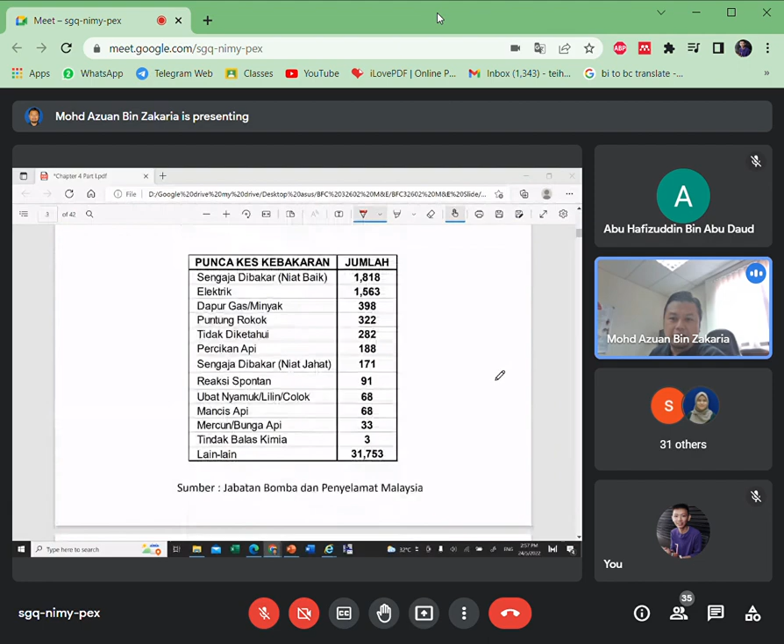Fire safety system is also very important in building, as I will explain later. It is one of the requirements before a building can get permission to live in, right? Hopefully you already read it, so we can discuss and communicate in two ways about the content. Okay, let's look into some statistics.

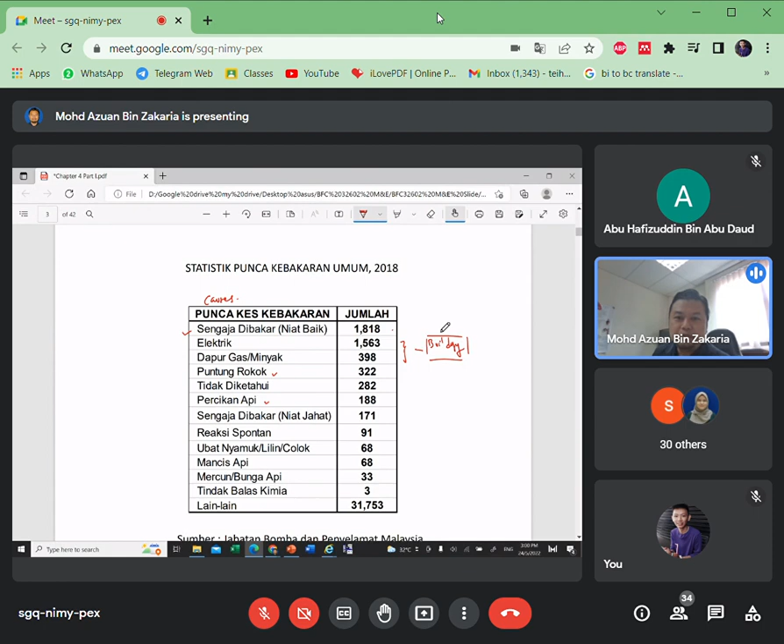This is a quite serious problem, because building is where we live, as a residential place or a place to work, but it is prone to fire. That's why fire safety is very important.

As I mentioned before, fire safety is one of the requirements to get certificate of completion and compliance, to make sure the building—if it's a newly constructed building—needs permission to be able to live in, and one of those permissions comes from the fire department. There are many requirements for a new building, but fire safety is also one of the important requirements.

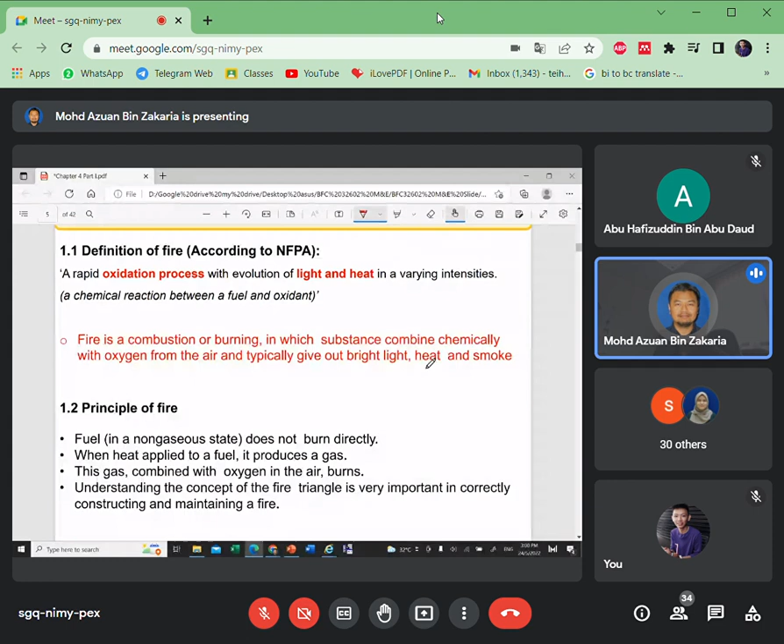All right, let's move into what is fire. How can fire happen? Hopefully you already learned this. As you can see in these slides, how fire is created is important to understand, because when you understand this, then you know how to deal with fire.

Basically, fire happens when 3 components combine together: fuel, oxygen, and heat. What is fuel? Fuel is actually a combustible material or substance—not only petrol, not only gas, but any combustible material or substance can be categorized as fuel.

And then we have oxygen, which is in the air, and heat, which can be a spark. So a spark of fire combined with air and combustible material—when these exist together, it can cause fire.

When you understand this, you know that if we want to remove the fire, if any of these components are removed, the fire will go out. So to remove fire, we have to remove one of the components—if there is no oxygen, the fire will stop. If we can separate the fuel, we can remove the fire, or if we can remove the continuous heat, we can remove the fire. So fire needs all of these.

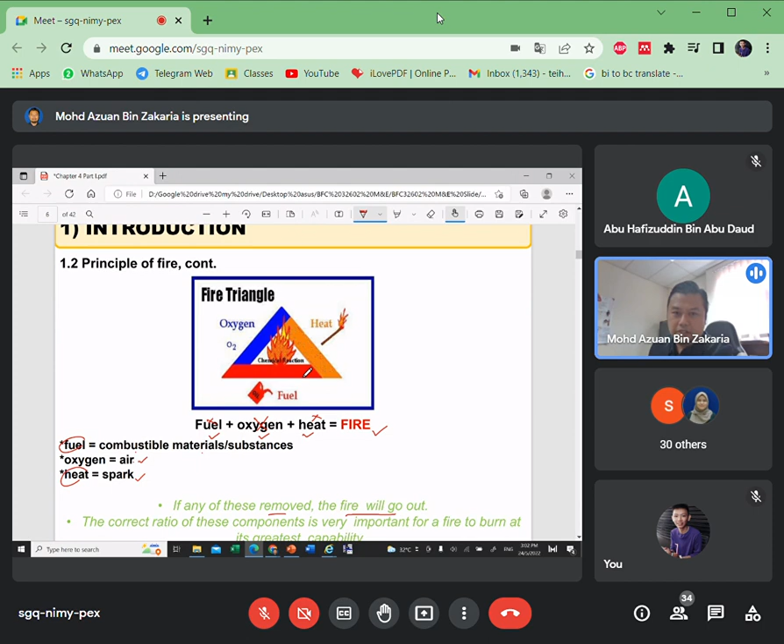To remove fire, there are firefighting agents—five categories based on NFPA, the National Fire Protection Association. This is global, there are five categories: Class A, Class B, Class C, Class D, and Class K. What you have to know is different classes of firefighting agents use different materials, or are suitable for different materials.

For example, Class A involves flammable solids. What type of solids? For example, woods, cloth, rubber, paper, and some types of plastics. So basically, it is for solid materials.

So how do we extinguish the fire for Class A? We can use water, dry chemical powder, and foam. What is dry chemical powder?

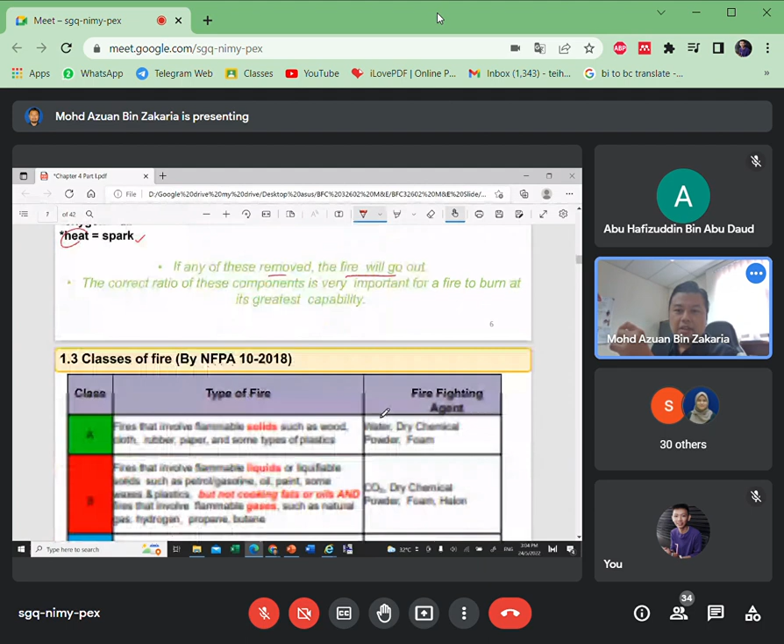The chemical powder is, for example, as you see in the fire extinguisher in the red tube, labeled normally ABC. It will pump the powder to extinguish the fire. Basically, chemical and foam want to provide a layer that can separate the fuel from the air. Water is to remove the heat, dry chemical powder also removes the heat and can separate the combustible materials. The foam creates a layer to divide the fire and the oxygen.

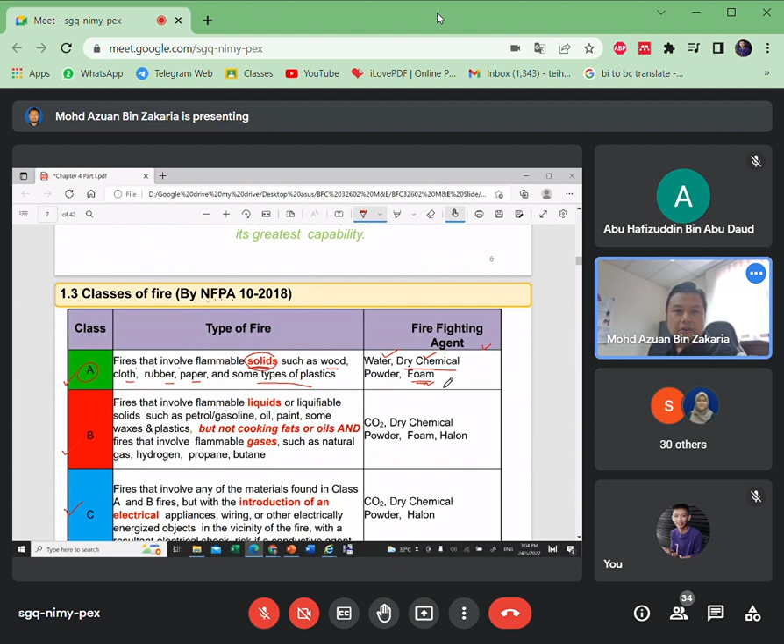All right, that is for Class A. What about Class B? Class B is fire related to liquids or flammable liquids, except liquid related to cooking. Class B is fire that involves flammable liquids such as petrol, gasoline, oil, paint, and some wax and plastics, but not cooking fats or oils, and fire that involves flammable gases. So not related to cooking is B.

So in this case, we can use carbon dioxide, dry chemical powder, foam, and halon. Halon and CO2 are actually gases. So you can see that we cannot use water. Class B, if there is a flammable liquid, we cannot use water. You need to be able to distinguish about it.

Class C is fire that involves any material involved in Class A and Class B, but with the introduction of electrical appliances. So basically, C is related to electricity, fire that involves electrical appliances. In this case, we can only use carbon dioxide gas, halon gas, and dry chemical powder. We cannot use water. We also cannot use foam, because foam also contains some mixing of water, and it can be a thermal electric conductor.

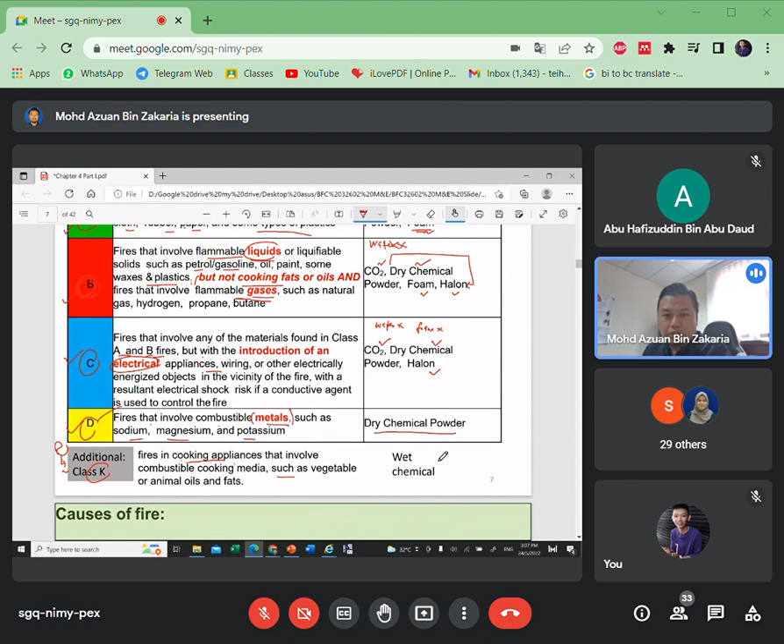Lastly is the additional class, Class K, number 5. Class K is for fires in cooking appliances. So any liquid from B, except for cooking fats, oil, and flammable gases, is moved to Class K. For Class K, the suitable material is wet chemical.

So by understanding this, if there is a given case study, you know what is the suitable firefighting agent to be used for a certain case. You need to understand first what type of material is involved, or what type of material or equipment is mostly in the room, and then we can provide the suitable firefighting agent.

Next, the important thing is for buildings, normally there are two types of fire protection system: one is passive, another one is active. So is it okay if I ask you, what do you understand about passive system?

Anybody? You can also write in the text box. Okay, based on your reading, what do you understand about passive system and active? Any answer? Tak ada. Okay.

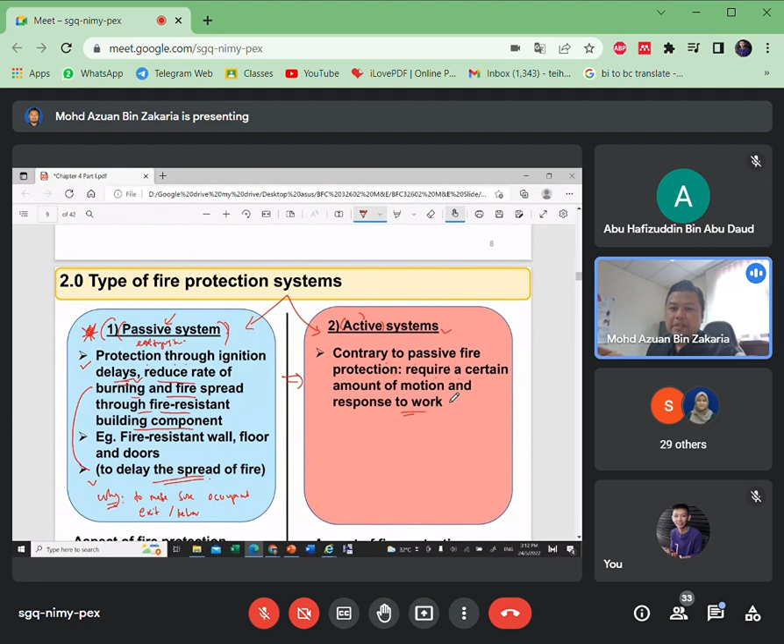Next, we look into the active system. Now, active is opposed to passive. So in active system, contrary to passive fire protection, it requires a certain amount of motion and response to work. Basically, active system is where a trained person or the system itself needs to extinguish the fire.

So hopefully you can understand the basic fundamentals. Thank you for your answers, both of you, all of you. Your answers are basically correct, but let me explain further.

Okay, there are many examples or aspects of fire protection in passive system, but here I bring up several, which are building utilization, compartmentation, and means of escape.

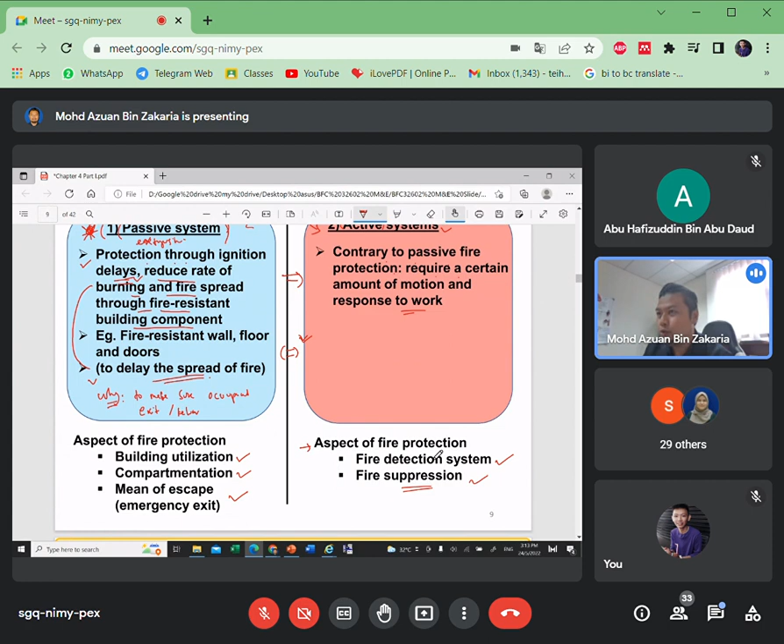For active fire protection system, we have detection system and suppression. Suppression means to extinguish the fire. So basically in a building we need both systems to act together.

All right, let's go into passive system number one, building utilization. If we look into the definition, it means limiting the number of persons using an undivided space, such as meeting room, classroom, auditorium, hotel room, or stadium. Building utilization normally exists to limit the number of people.

Why do we want to limit the number of people? For example, if in a building - this is the plan of a building - we have an office, a meeting room, and an open space working area. It has an area, in meters squared. So based on each area and number of doors, it should be designed to be suitable for the number of occupants.

We need to limit the number of occupants working in a space. The reason, as you can read here, is to ensure occupants are able to leave the building through the available number of exits in a reasonable amount of time, without trampling each other in a panic situation.

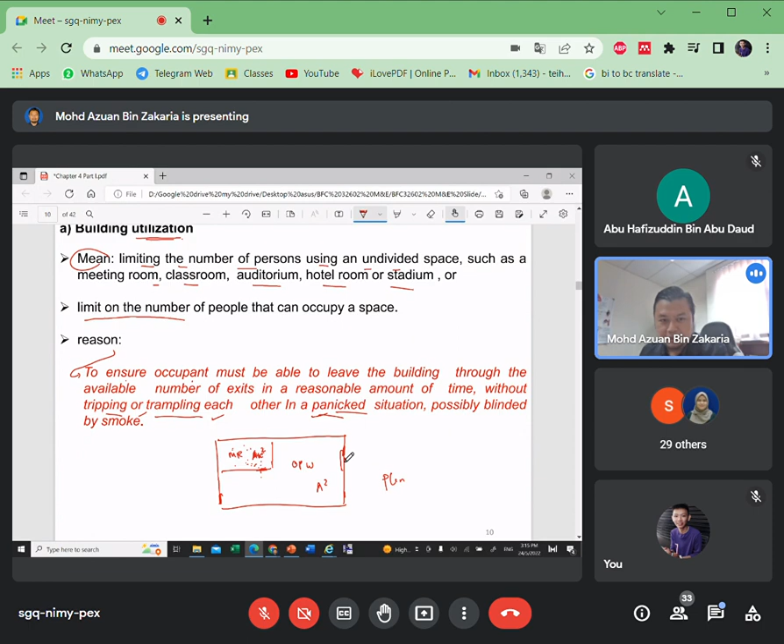Without trampling each other in a panic situation, because everyone panics, right? So if there are too many people, they tend to panic and push each other, trampling or tripping each other while trying to leave the building. But you can understand the name utilization - building usage, space usage. That is number one, building utilization.

But in detail, there are many requirements or regulations regarding utilization specifications you need to refer to. In Malaysia, we have the Uniform Building By-Law document, or the Fire Safety Standards of Malaysia.

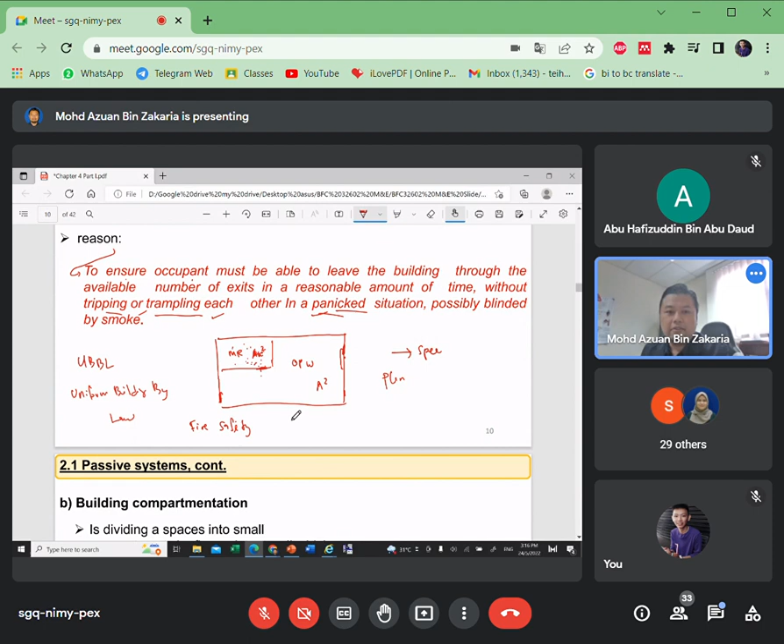So in this course, we introduce you to the types of systems, but if you want to learn more in detail, you need to refer to all of this, because it is very detailed - based on the area, based on the type of building, what is the required, available, allowable number of people that should be working in that confined area. All right, number two is building compartmentation.

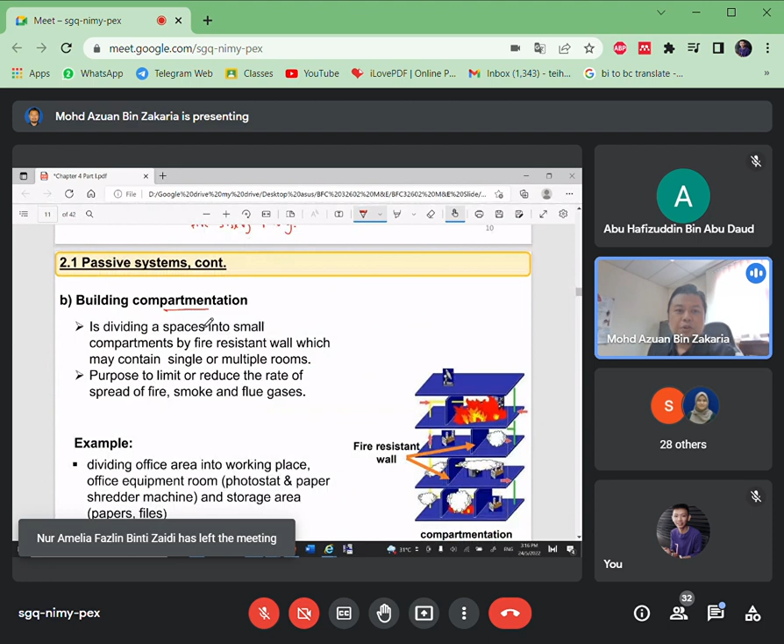As you can see here, the definition is to divide a space into small compartments by fire resistant walls, which may contain single or multiple rooms.

Let's see in this figure. So if we have several stories, to make sure the fire doesn't easily spread, it is suggested to make a compartmentation. Compartmentation is to make the area smaller by a partition made of fire resistant wall. For example, if fire happens, it can still spread, but it will delay.

Because the wall, normally a fire resistant wall, has many specifications. There is 1 hour retention, 2 hour retention, 3 hour retention, depending on the thickness and the material.

And sometimes if you already learned building design or concrete design, you have a beam, for example, and also concrete cover. The thickness of the concrete cover also plays a role and gives an impact on how many hours the structure can retain or delay the fire.

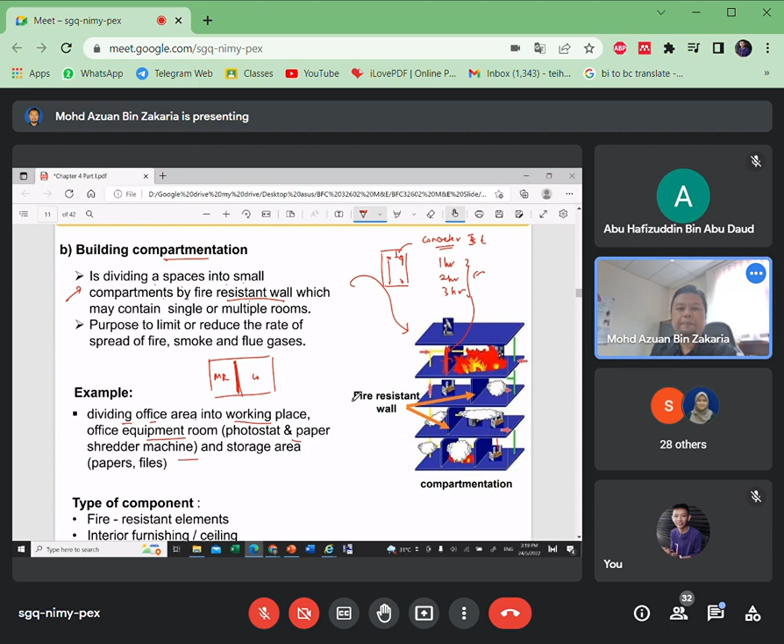So for example, they suggest that the area with many combustible materials such as paper needs to be divided like this. This is the working area, this is the machine room, divided by a compartmentation wall. The important criteria is that the compartmentation wall should be made from fire resistant element.

So this is some figure. Fire resisting element can be fireproofing material, fireproof spray material, or the building material itself, for example, fire resistant door or partition wall.

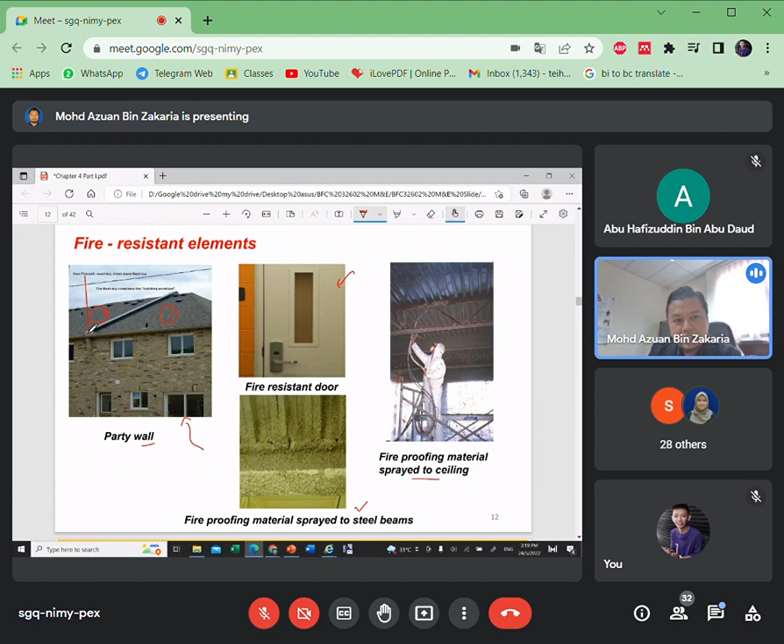So in this figure, normally in Malaysia also we can see if you live in a terrace house - this is house number 1, this is house number 2. Basically, you can see a slight increase in the roof. This is what we call a party compartmentation, or party wall.

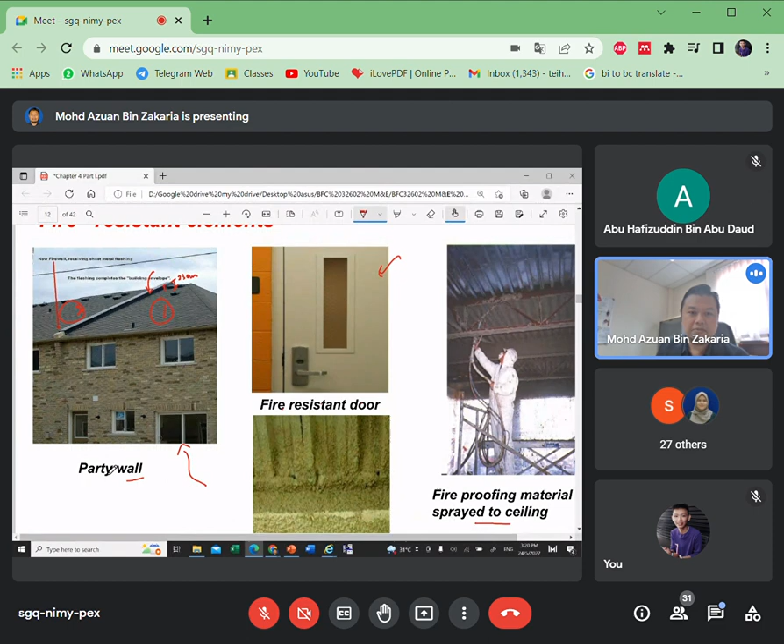In some specifications there is a required number. For example, 230 millimeters should extend from the roof to show that this is a party wall. This is for fire regulation. It's not just designed to extend a little bit - it's a requirement that a party wall should extend several millimeters.

Okay, last but not least, for passive protection - the purpose is to make sure people can evacuate properly. So it is a means of escape.

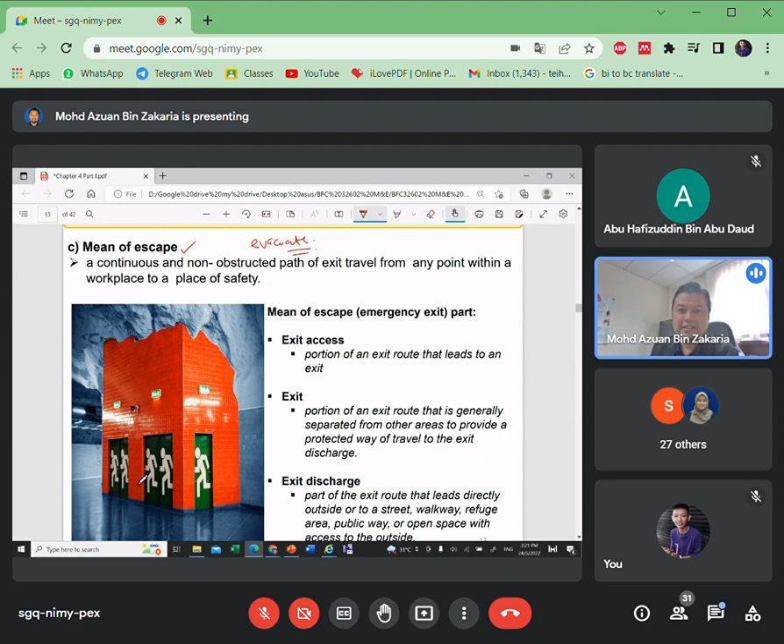So you can see means of escape, or safety stairs, somewhere. Maybe before this you didn't really think about the importance of means of escape. And normally the door of means of escape is not always closed - sometimes people prop it open for a long time. But actually means of escape is one very important thing that needs to be applied in a building.

So basically it has 3 portions: exit access, exit, and exit discharge. Exit access is a portion of the exit route that leads to the exit.

Let's draw maybe here. Okay, let's use this example. So we have 3 parts: exit access, number 2 is exit or exit route, and number three is exit discharge.

So basically in a building, it's already properly planned. For example, here, if you're working in some of this area, this example is the exit route, and before this is a fire safety door. Exit access is the area where the path should not be obstructed and should clearly lead to the exit door.

So the exit access requirement is that the exit door and exit access should be clearly notified, and the path should not be obstructed. This is exit access, the way the path leads to the exit route.

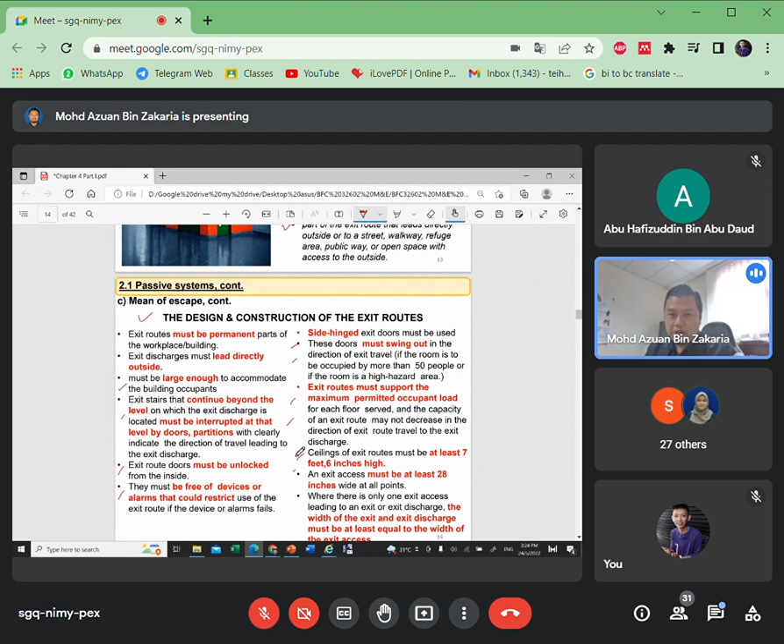Detail of the means of escape exit you can read here - this is basically some of the requirements, I believe I will not discuss in detail. There are many, so normally when we design, we refer to the standards for what should be done, and make sure all of these requirements are put into a contract document and checked during construction. So the important thing here is exit access should not be obstructed.

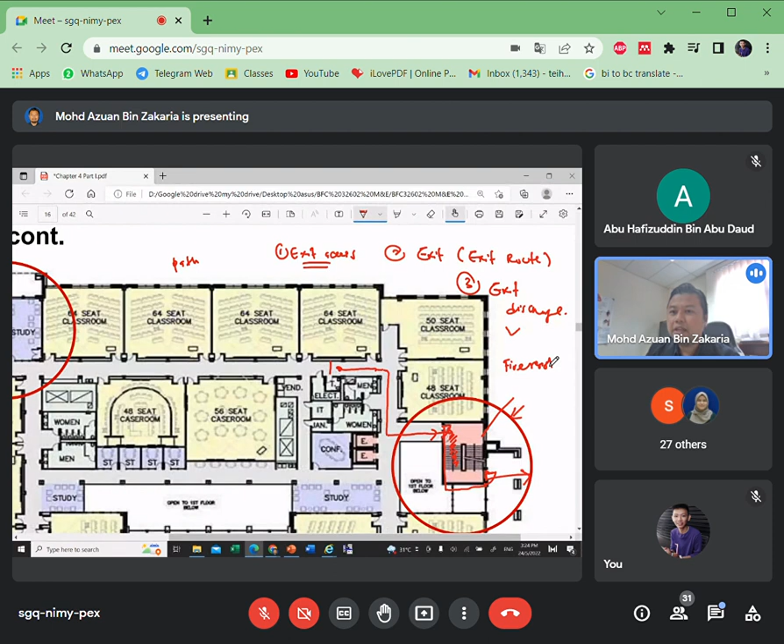Exit route should be covered. So the exit route here, this wall should be fire resistant. Normally the staircase for fire safety route is slightly more fire resistant. We can say this part is compartmentation, and then it should have good ventilation.

Because when fire happens, statistically many people pass out not because of the fire but because of the smoke. That's why if fire happens, we need to get down or crawl as low as possible, because the hot fume and smoke go up and distribute to the upper space. So we need to go lower to get fresh air, and the best way is the exit route should have very good ventilation to extract the smoke.

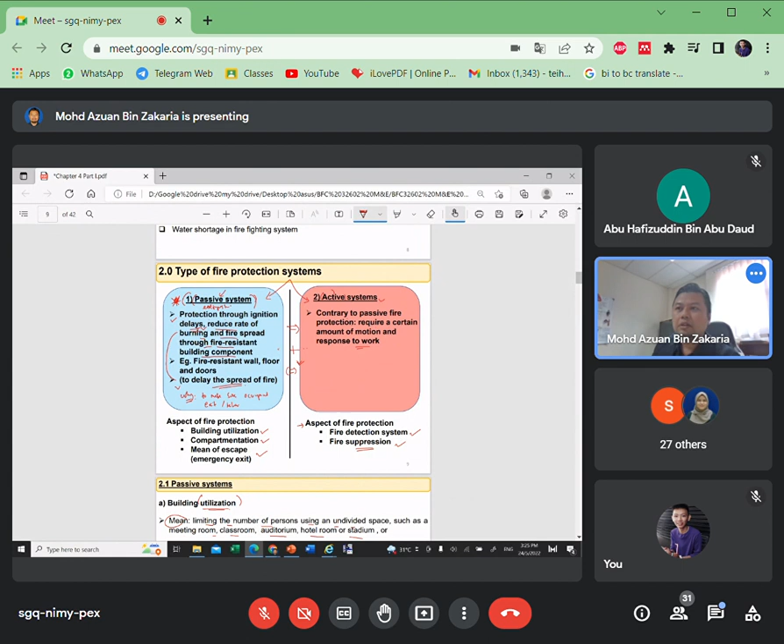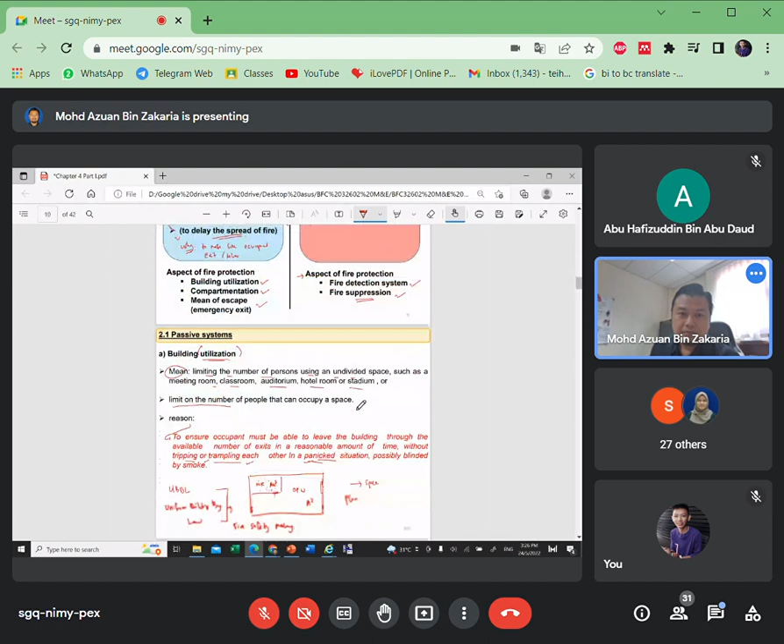So that is the requirement for passive design. Again, in the passive system, we don't deal with the fire directly, but the building design provides protection to make sure occupants can evacuate from the building safely. Most importantly, it prevents tripping or trampling each other.

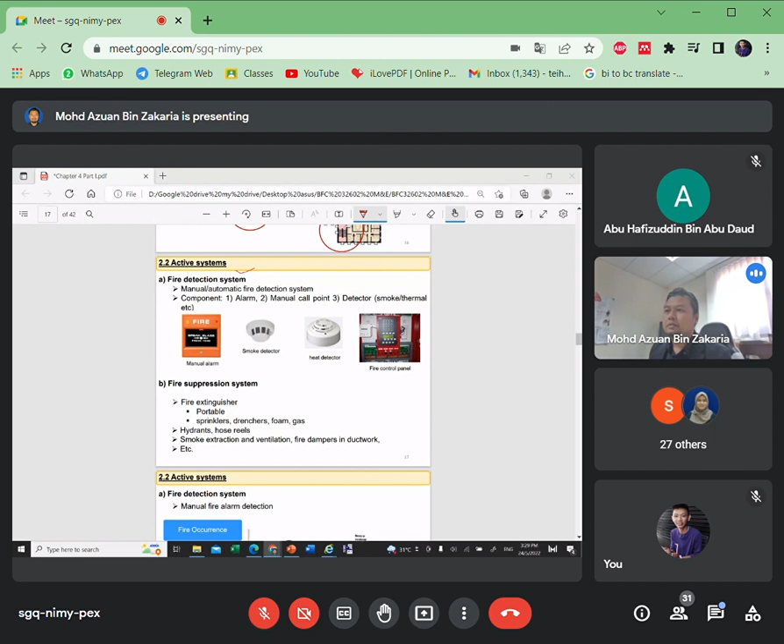Alright, the second part is active system. This is the system that you may also see in the building. As I mentioned before, for active system it's all by a specific system, right? So we have a fire detection system and fire suppression.

For detection system, we have either manual or automatic fire detection system. The components are normally alarm, manual call point, and detector. This is an example of a manual alarm, where you need to break the glass. This is a smoke detector, heat detector, and normally in the complete system, all the sensors will attach or link to the fire control panel.

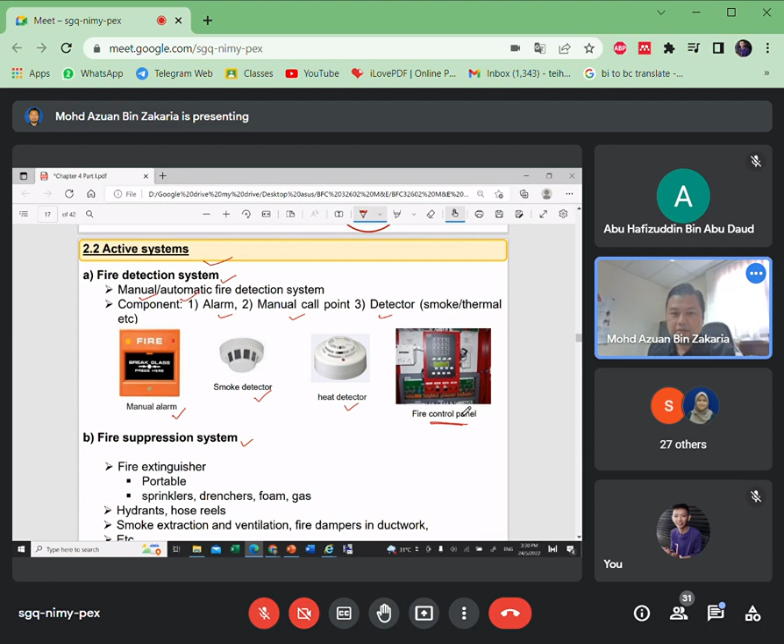Meanwhile, for the fire suppression system, there are many types. For example, starting from the simplest one, which is the fire extinguisher, which is portable, and then fire sprinklers, drenchers, foam and gas, hydrant, and smoke extraction. In this course, we just want to introduce you to the types of available systems and how they look.

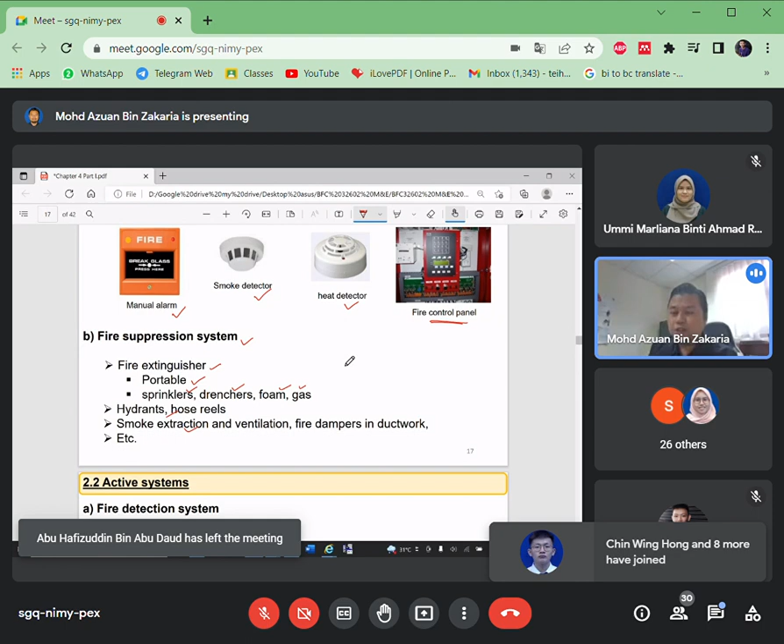Meanwhile, for automatic fire alarm, it has a smoke detector or heat detector where it can send data to trigger the alarm and show it in the control panel. In the modern or advanced system, it can automatically connect to the fire department.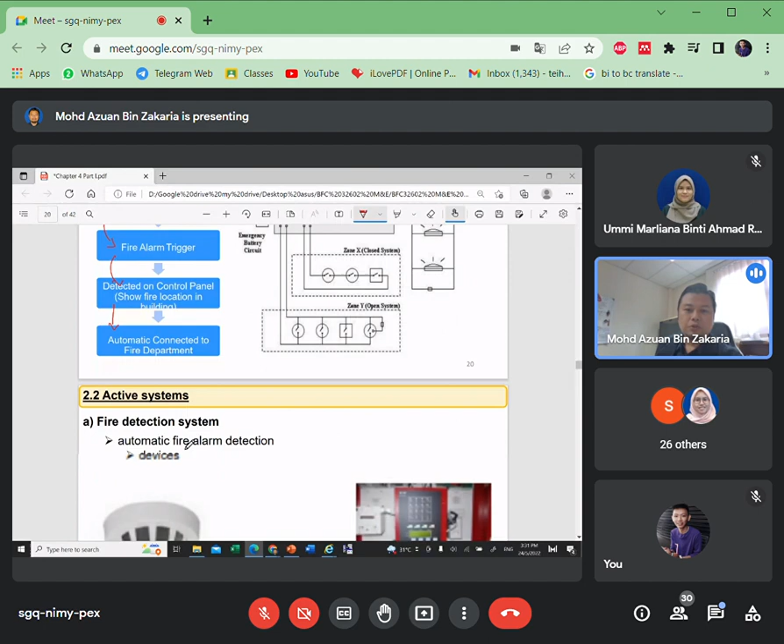So the control panel - I'm not sure if you've seen this before. Normally in the control room there is this control panel, and it shows the layout with the location of rooms. For example, this has 16 - this is actually an LED bulb, LED light. So these 16 lights mean there are 16 sensor locations. If a sensor is activated, it will switch on, blink, or something like that, so the person in charge can check which sensor is activated. Alright, so this is the control panel.

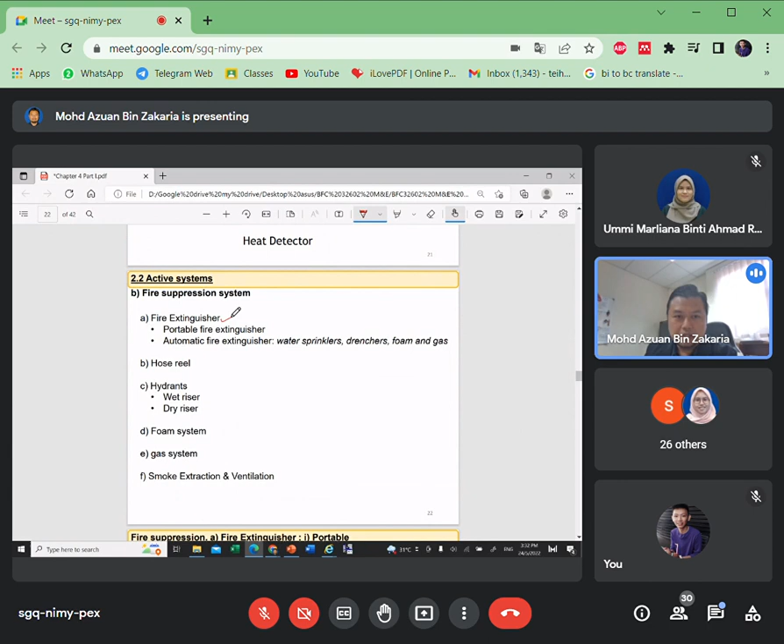Next we have the suppression system. The simplest one is the fire extinguisher, which looks like this - dry powder ABC. So what actually is ABC? Do you know? Can anybody answer - what is ABC, and why is it named ABC?

All right, fire category - yes, you are correct. So dry powder ABC means it's suitable for class A, class B, class C. Dry powder is suitable for solid, suitable for flammable liquid except for cooking, and C for electrical.

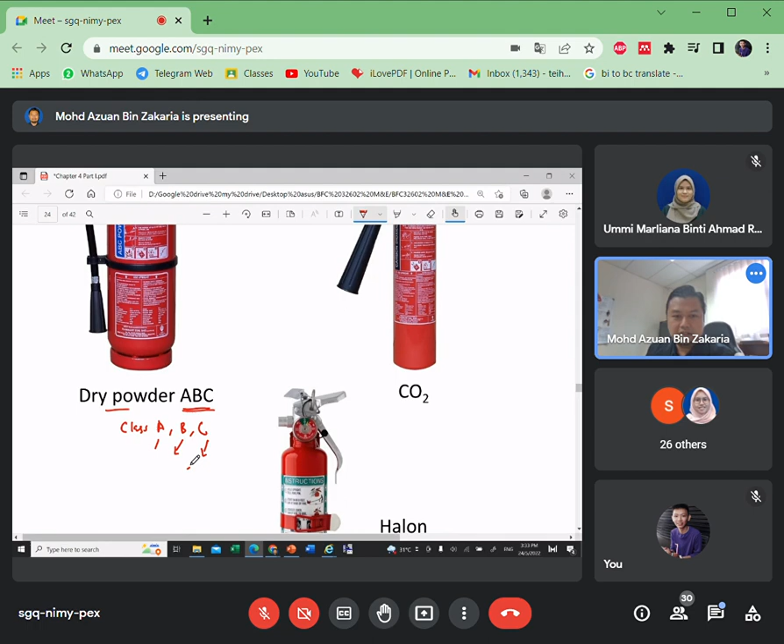And then we have CO2. Normally dry powder ABC, the label is in blue color. Even though the container is mostly red, it has a label - dry powder has a blue label. CO2 has a black label, and also the extinguisher nozzle is different.

Basically these two are available in the market, in the shop - you can purchase them based on the weight and size. Maybe the price for 1 kilo is about 70 to 80 ringgit, and the big one is about 150 ringgit. For CO2 it's slightly expensive, starting from, if I'm not mistaken, 180 ringgit for the CO2 gas.

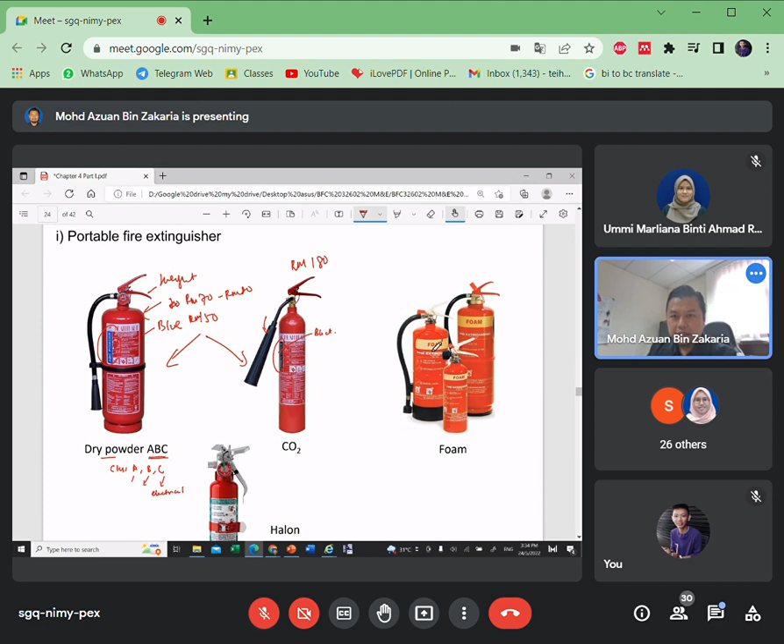And then slightly special, which is foam, normally with a cream label. And then this is halon gas - personally I never see it directly, but it exists. So these two, CO2 and halon, are gases.

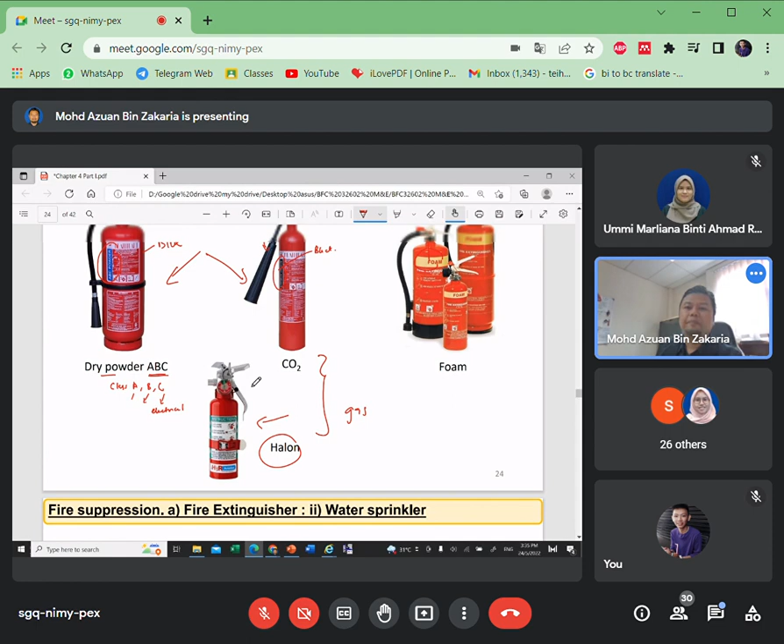So we need to use the fire extinguisher based on class. That's why it's very important to understand the type of fire first. So you cannot just use any extinguisher as you like - you need to properly choose the suitable fire extinguishing agent.

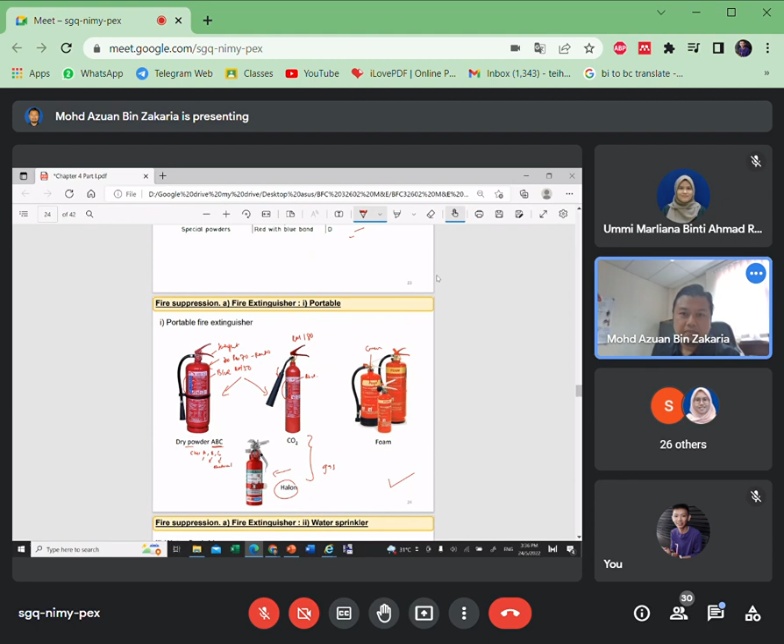Okay, this is the simplest one. In your house, maybe you can use it directly, but in office or public areas you still can possibly use this. But normally in public buildings there is a person in charge of building safety to use it. But if there's nobody to take action, the first thing is to evacuate first. Normally the fire department will extinguish the fire, except if you are the person in charge.

All right, let's move to a slightly complicated one - the fire sprinkler, water sprinkler. Not all buildings have it, even my office doesn't have a fire sprinkler, but outside the building there's a fire extinguisher. So how the fire sprinkler works: there is what we call the fire sprinkler bulb and nozzle, which attaches to piping in the fire safety piping system.

Normally the water is retained by a bulb - this is a glass bulb. Inside the glass bulb there's a temperature sensitive liquid. When it gets heated, it will expand and break the glass, and the water will be sprinkled.

This is number one. Number two is the soldered strut type - this metal sustains or holds the water, and it's also a temperature sensitive element. So when fire happens and it gets heated, the soldered metal melts, and then the water will be released. So there are two types of sprinkler heads.

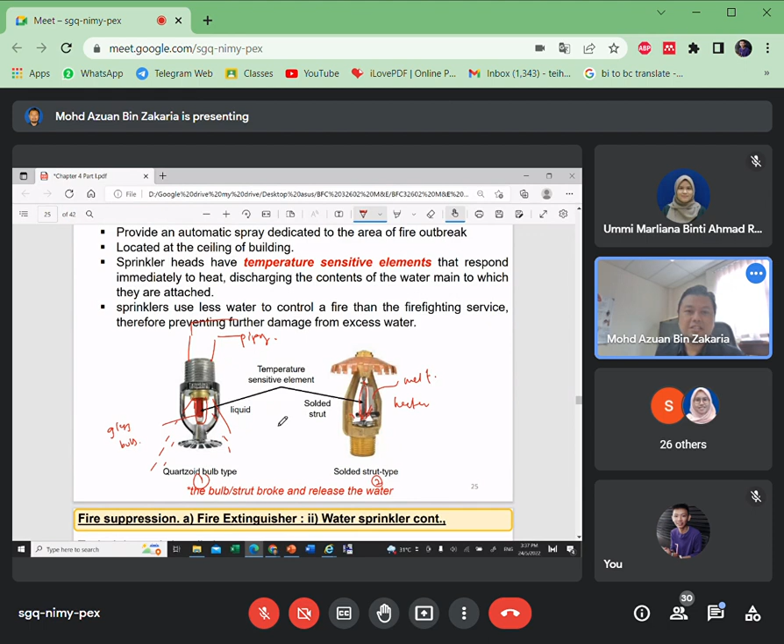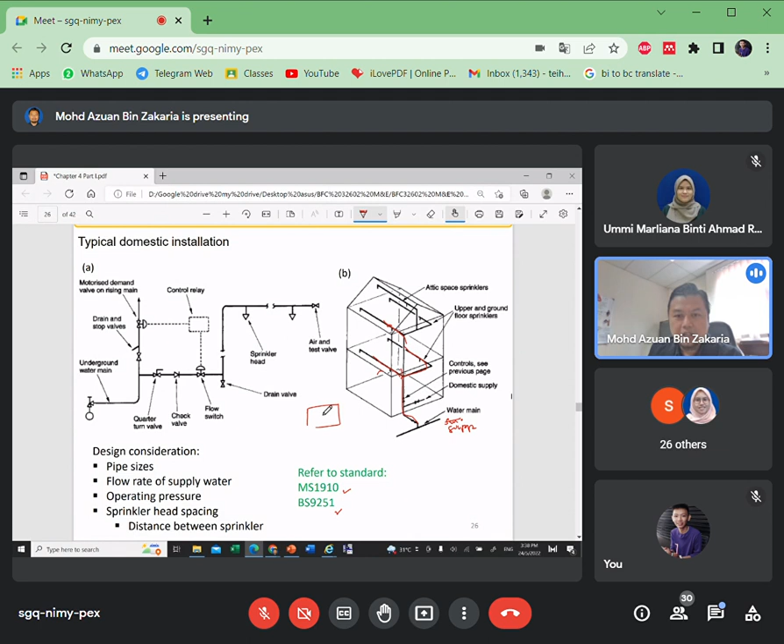All right, normally the sprinkler is distributed like this. You can refer to MS standard 1910 or British standard BS 9251. In basic distribution, we need a water supply source, and then a riser to distribute to all locations. There is a calculation actually for how many sprinkler heads are required in one area, but we will not go into detail.

Design considerations - we need to consider pipe size, flow rate of supply water, operating pressure, sprinkler head spacing. There are calculations for the distance between sprinklers. In terms of the sprinkler type itself, there are two types: wet pipe system and dry pipe system.

In a wet pipe system, the pipes are always filled with water - there is always water inside the pipe, and if the sprinkler head is activated, it will immediately sprinkle water. This is wet pipe system. But in a dry pipe system, there is no water ready in the pipe, but it is full of pressurized air. Remember, there are two types: wet pipe system and dry pipe system.

Dry pipe system is not readily filled with water, but filled with air pressure. So when the fire happens, the air will vent out first, then followed by water. But the question is, why does this system exist? Why not just prepare the pipe with water?

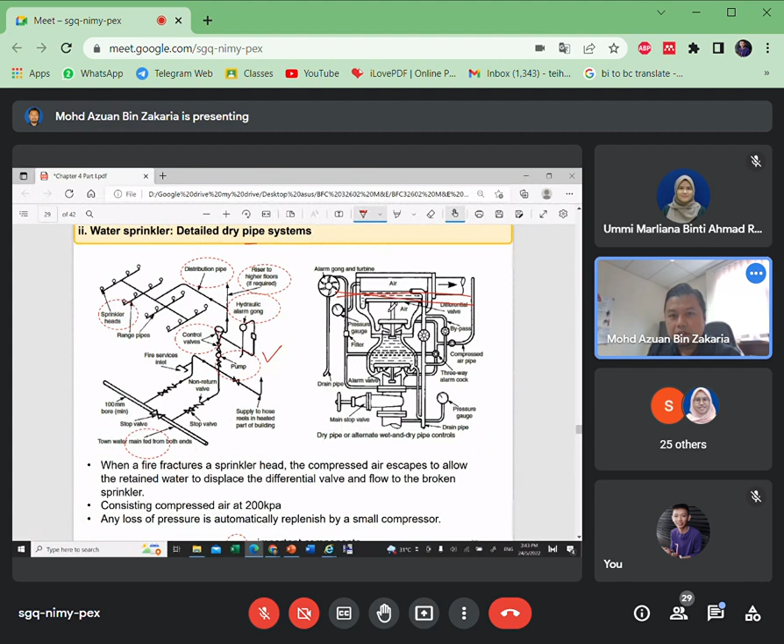Hydraulic alarm gong. So in this wet pipe system, all the piping, control valve included, is full with water. Compared to the dry pipe system - this is almost similar, but the difference is inside the control valve. In the dry pipe system, only half the water stops here, and then in the riser and all the piping is empty but filled with pressurized air. So when a fire happens, the air will be released, and then the pressure will push the water to the sprinkler head. That is for water sprinkler.

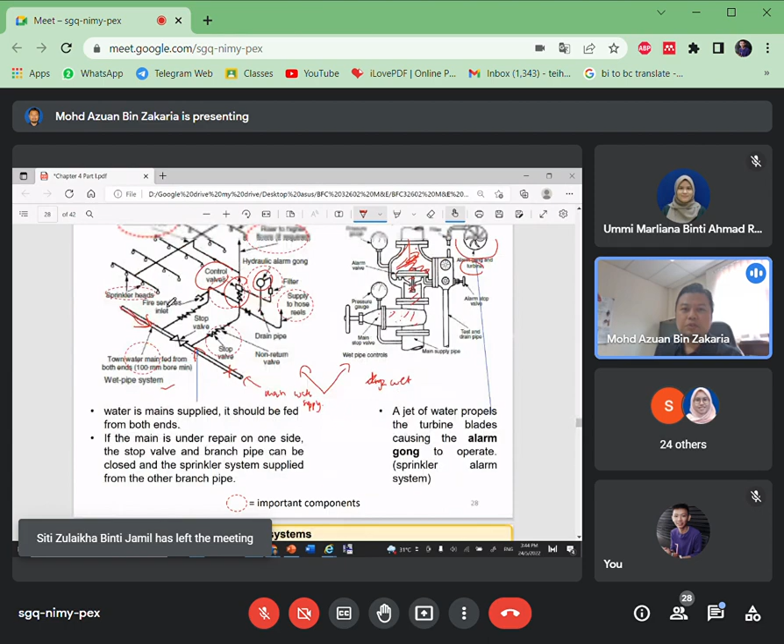Okay, so basically, if I want to draw a building, maybe I can show some schematic. Maybe like this. So if you have a building, normally, for example, several multi-story. So, for example, risers start from here. It will go to all stories and distribute the sprinkler.

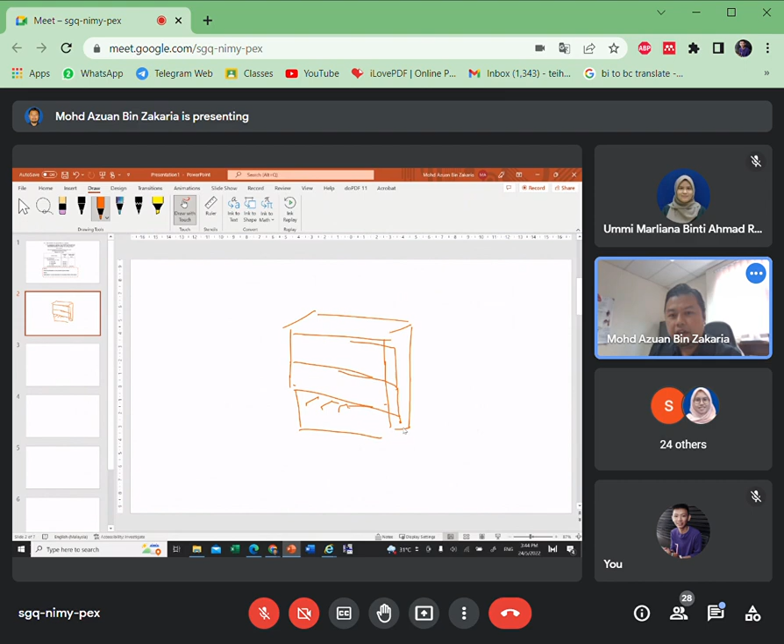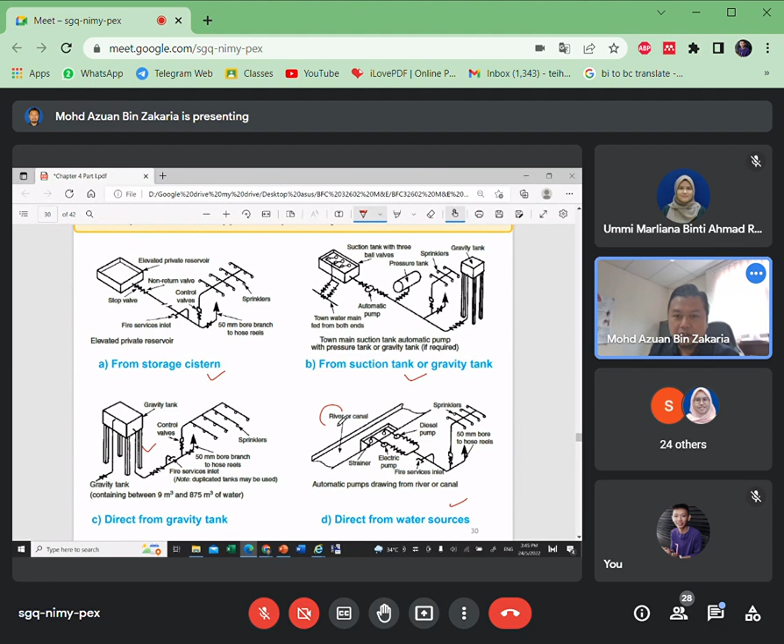And at the bottom, all the equipment is this one - all of this control valve and all the water supply. Then where is the sprinkler, or where does this water source come from? It can come from a storage cistern, suction tank or gravity tank, direct from gravity tank, or direct from a water resource, for example from a river. So from a river we need a pump. So hopefully you can understand it. So this is from water tank or source. So source is from here, either one of these.

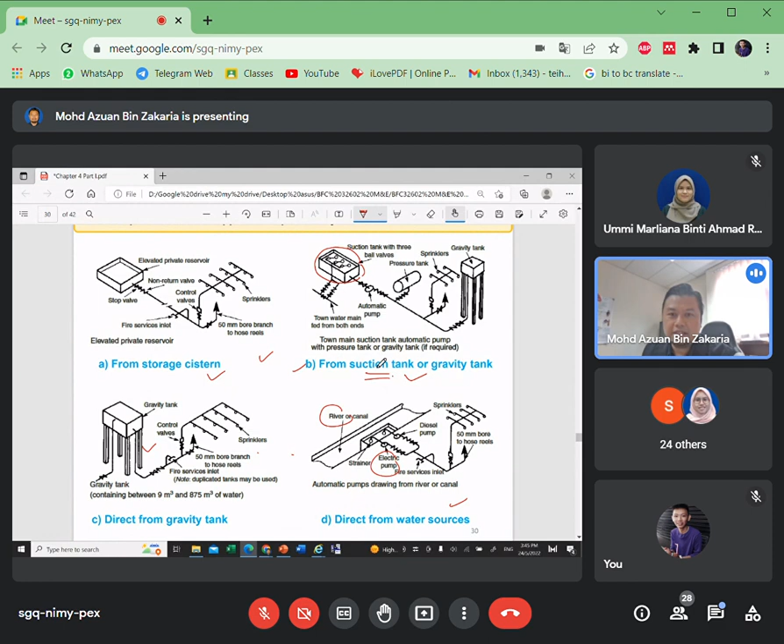Suction tank - I will explain later in chapter 6, the purpose of suction tank. But for now, you can understand it as a gravity tank or suction tank. Okay, is it okay if I continue? We have still many.

All right, so basically I believe, okay, I will go through briefly. So the next system is drenchers. So from what you see here, if you already read, can you point out what is the difference between drenchers and sprinklers? Can you find any differences? Drenchers and sprinklers - is it the same?

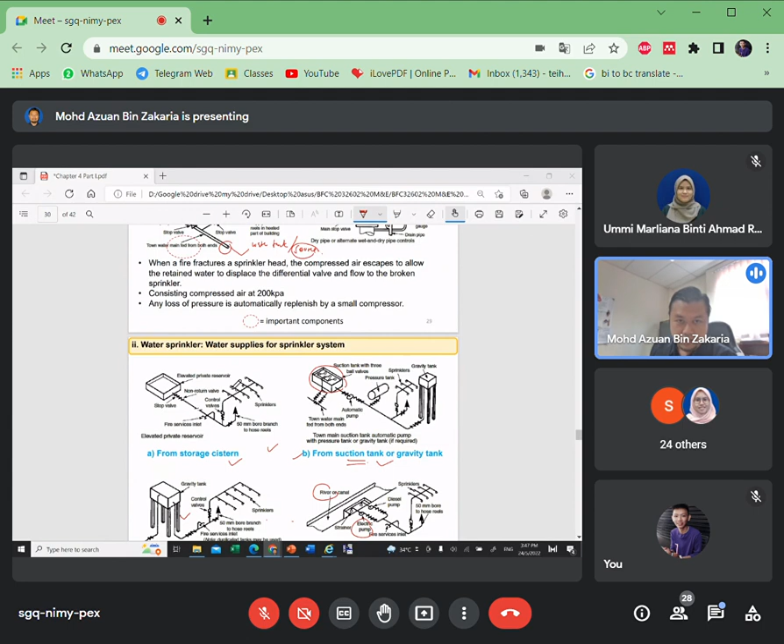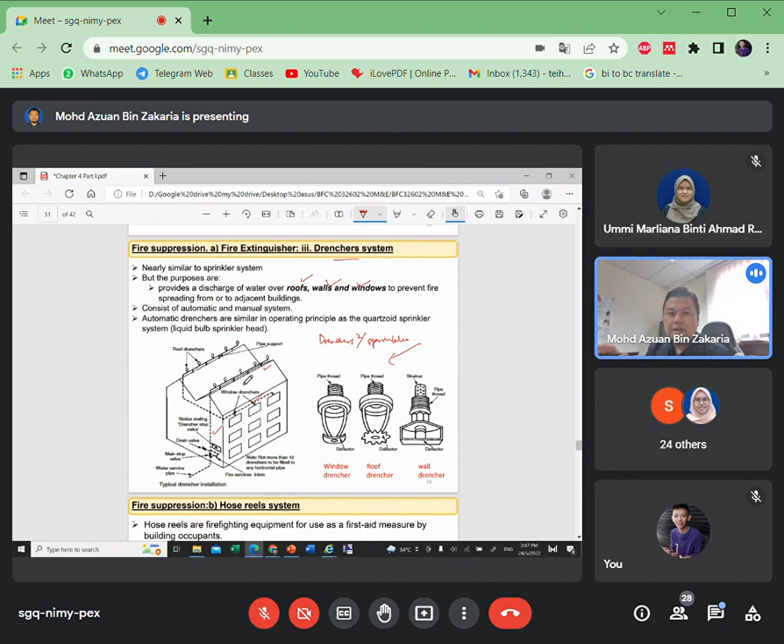So drenchers - if you read, the working principle is almost the same as sprinklers, but the difference is where it's installed. If the water sprinkler we install inside a building, inside a room, but for drenchers we install at the roof, walls, and windows. But honestly, I still haven't seen this directly applied in a system - maybe this system is installed in a different country, or in much more modern buildings.

Okay, another system is hose reel. All right, I believe you're familiar with hose reel, and this is how the hose reel distribution works, almost similar to sprinklers. They need a water source and control panel, control valve.

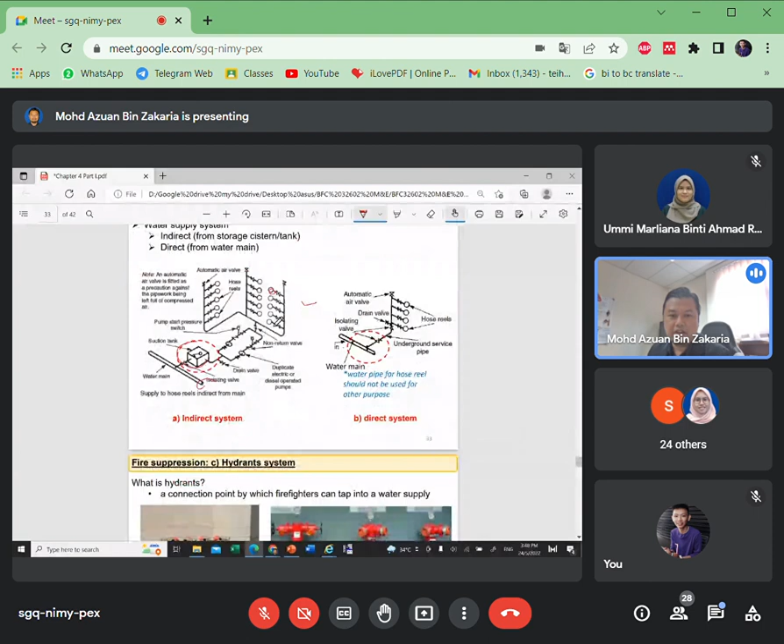Okay, supply all the hose reel at every level. And then we also have hydrants. So what is different between hydrants and hose reel?

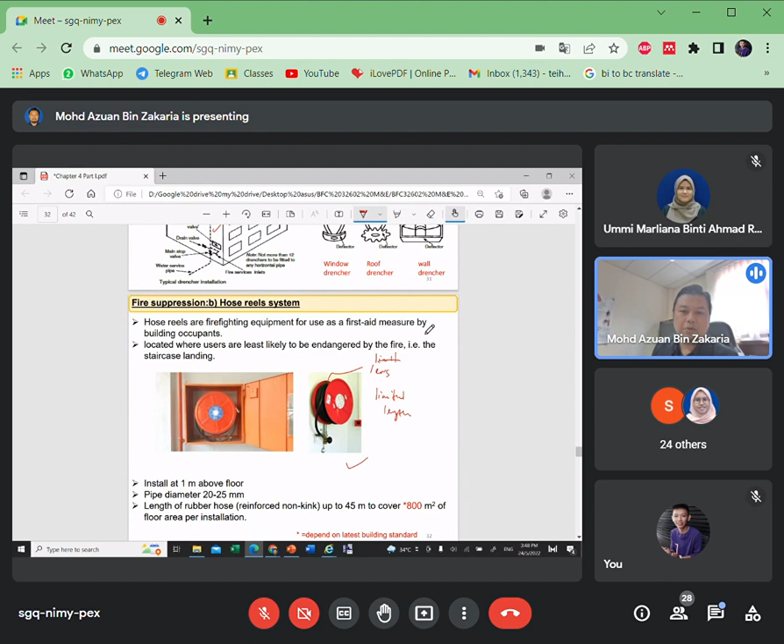Hydrants is just a source of water, pipes. Somebody or we need to attach the hose to these hydrants. But the hose reel already has a hose, but the limitation is it has a certain length only, limited length. For hydrants, we can attach a longer hose. So for hydrant we also have a wet riser and dry riser.

Wet riser always has water ready and is connected to the water supply tank. But dry riser needs water from outside hydrants, connecting to the dry hydrants, or normally can get supply from the firefighter vehicle, fire service vehicle. As you can see, dry riser is actually empty, no water. So if a fire department truck brings water, they can attach the hose with water to these dry hydrants.

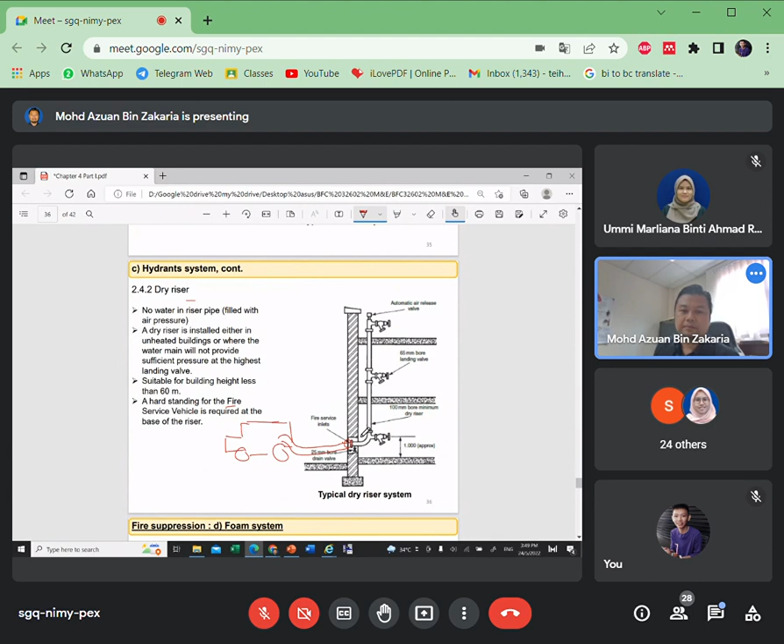The next system is also a foam system, but this one can have its own foam source. Number one is pump operated mechanical foam. Number two is premix foam, something like this. Imagine this will go to the room or the area.

The pump operated mechanical foam - this is the foam concentrate, so it's actually not foam yet, just foam concentrate. There is water here, and this acts as a venturi. When the system is activated, the foam concentrate will be pumped to the venturi, where it mixes with the water and creates a foam solution.

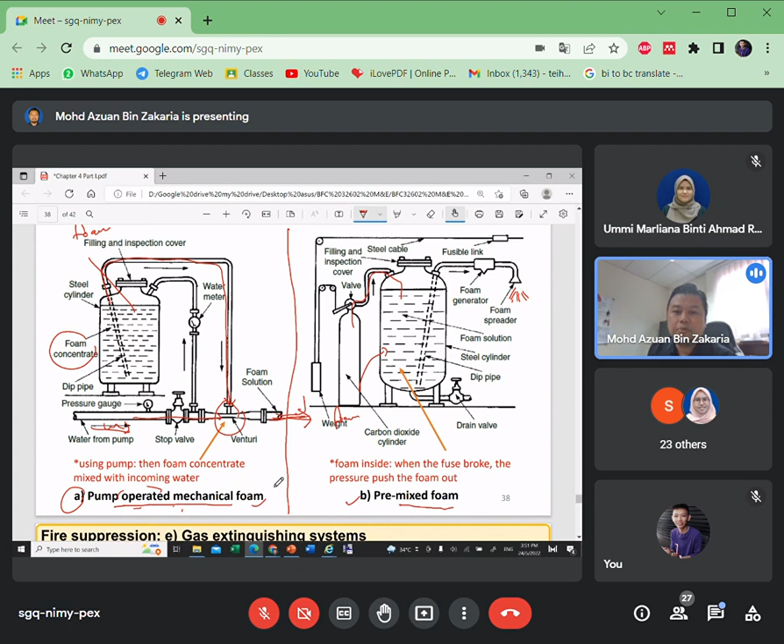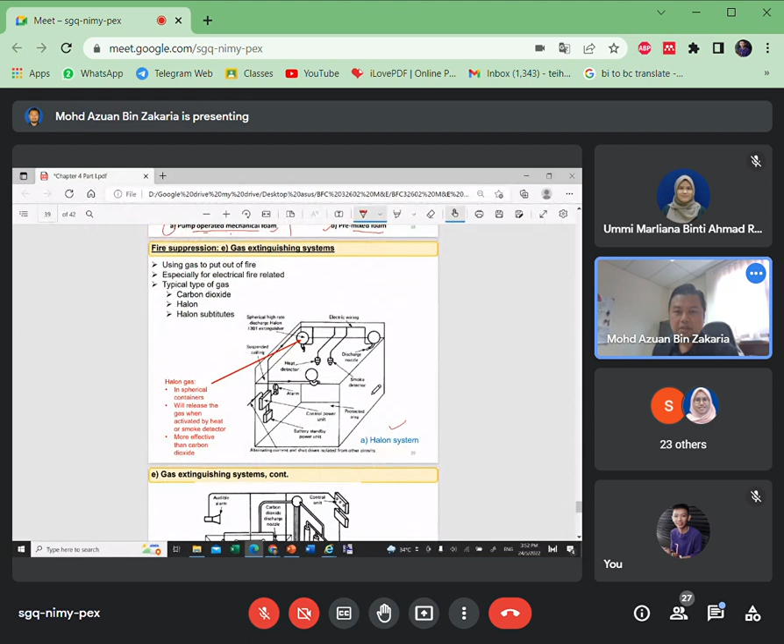Last but not least is gas extinguishing. In this slide we have a halon system and also a carbon dioxide system. The application is similar - inside normally we use gas. In the halon system, it has a spherical container, meanwhile for CO2 it's cylindrical.

So if this is a room, in the room it's attached like a sprinkler - the distribution is almost similar to a sprinkler. We have a carbon dioxide discharge nozzle at the top and the bottom, and all these nozzles are connected to the high pressure cylinder gas at the outside.

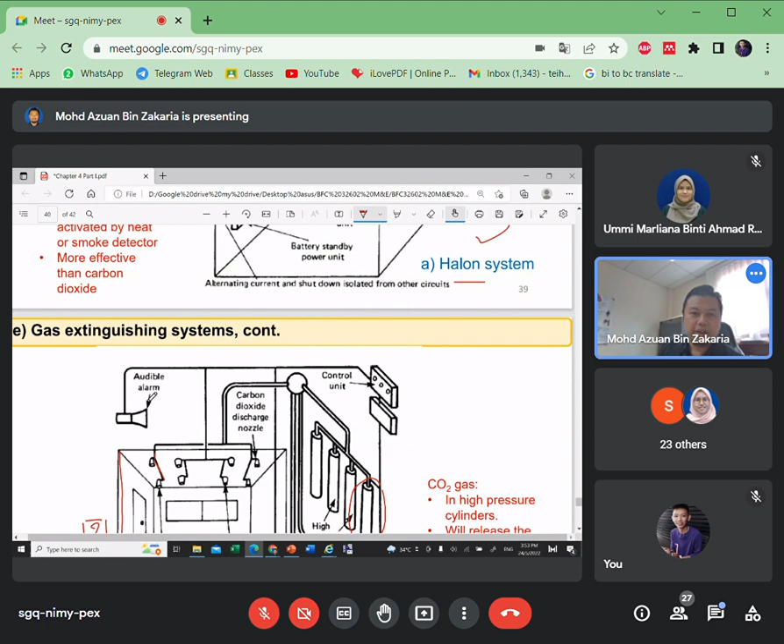So when this setting will use the extinguishing system, CO2 or gas - when will it be used? That is the question.

Last but not least, fire suppression by ventilation. There's much more explanation on this. The important thing is to make sure we can remove the smoke. There are many strategies, many types, but the keyword is: when fire happens, it is beneficial if the design has a very high opening.

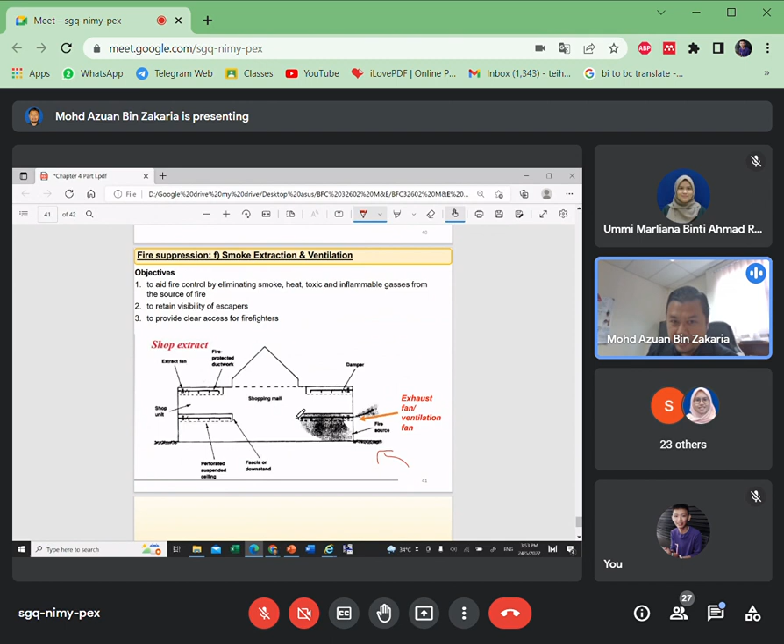So instead of a lower opening for the fire exhaust fan, it is recommended the building has an exhaust fan at the higher location as possible, to make sure the smoke doesn't accumulate at the lower area. If they can create negative pressure here, all the smoke can go to the higher level and not accumulate at the lower level. That is some of the key points to design a smoke extraction system.

But nevertheless, if the building doesn't have a high area, or for example an atrium like this, or maybe there is just a story with limited or low floor to ceiling height, then there's no option - need to use an exhaust fan at the wall.

Right, basically there is the introduction. I believe you can read in detail. So this is how the system works, or this is how it looks. This is the basic fundamental of all the fire safety systems.

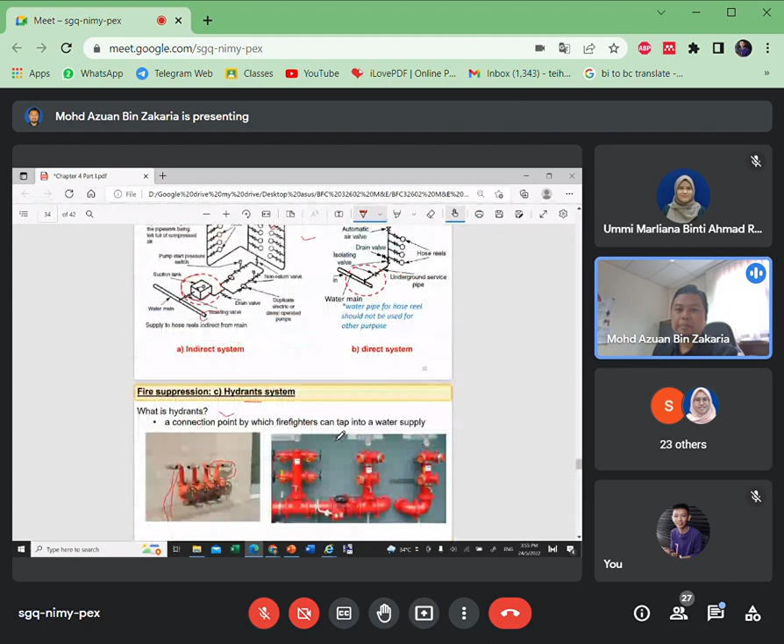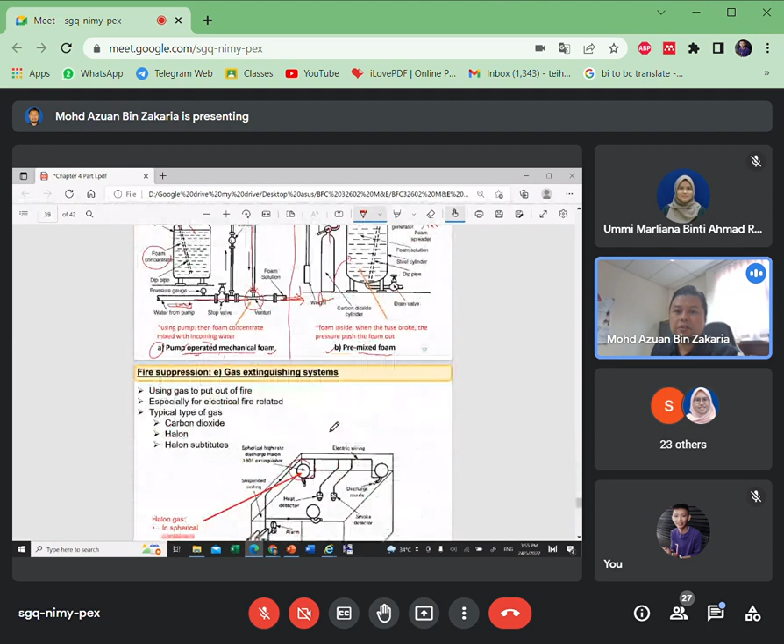So again, the question is, there are so many systems. Which one should we install? Which one should they design? Basically, above all, we still need to refer to building standards. Not all systems will be installed.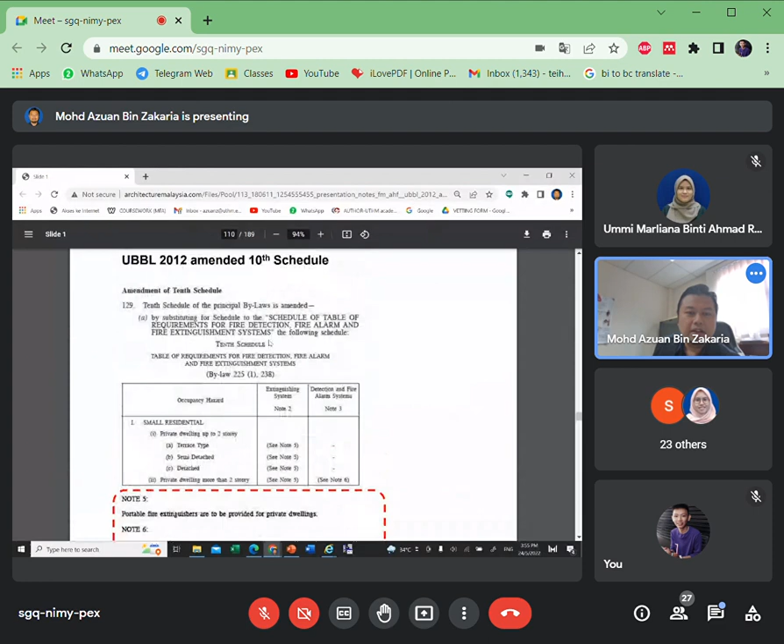This actually, in houses also, we should prepare some. As you see here in the building law, for small residences, private dwellings up to 2 stories, either terrace type, semi-detached, or detached house, at least a portable fire extinguisher should be provided for private dwellings. A smoke detector of the self-contained type is to be provided at the top of the staircase. So at least a fire extinguisher needs to be installed in residential or private dwellings.

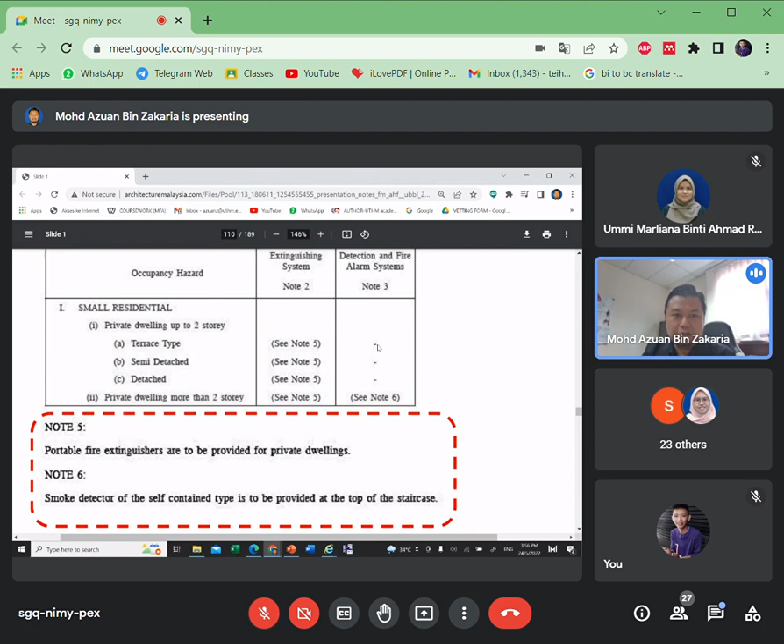So if you don't have one, if you have your own house in future, maybe you should consider having one. Next, for other types of buildings, it depends, and we should refer to the building standard.

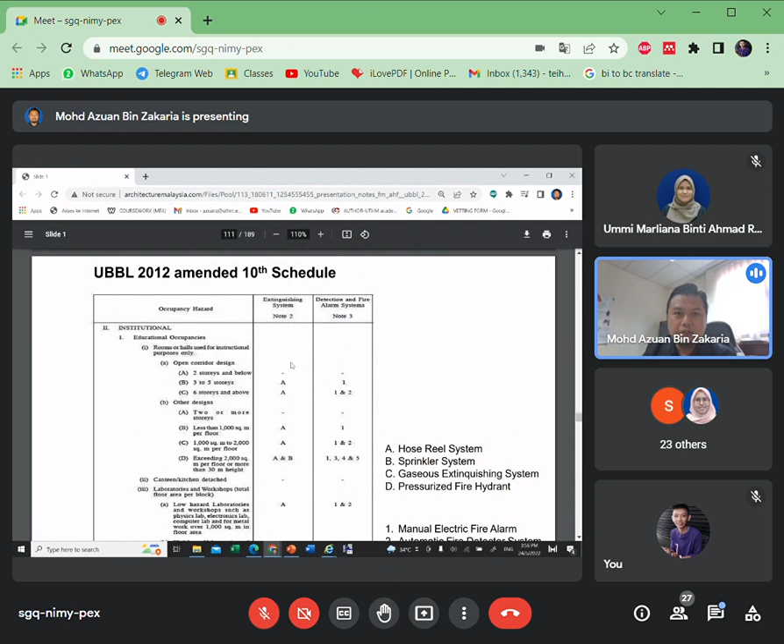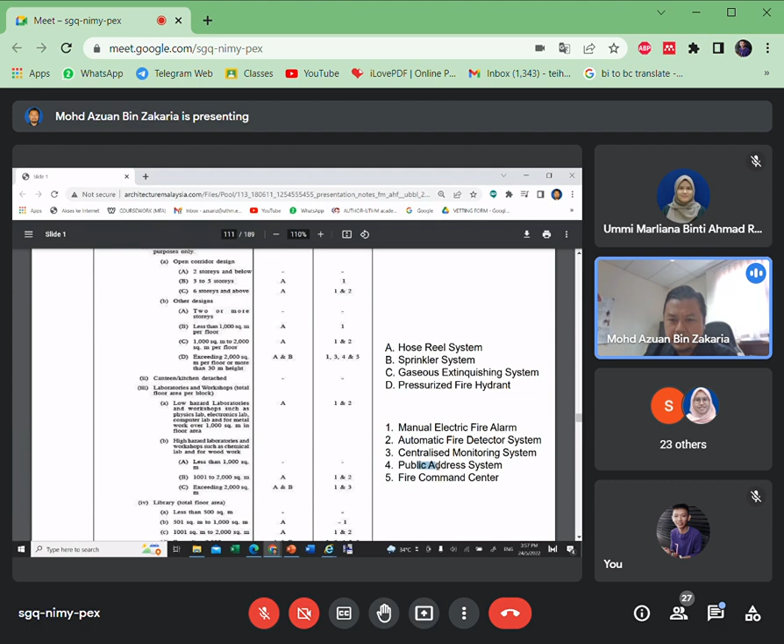As shown here, let's see what this legend means. A is hose reel, B is sprinkler, C is gaseous extinguishing system, D is pressurized fire hydrant. Number one is fire detector, manual electric fire alarm, automatic fire detector system, and public address system, and so on. For example, for educational buildings...

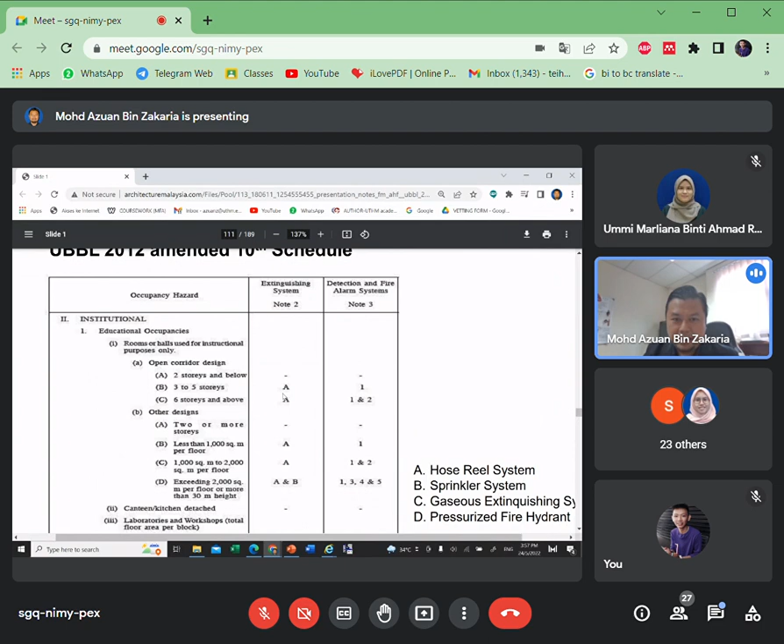they divide it into two: requirement for extinguishing system, and requirement for fire detecting system. So A, hose reel — it depends, as you can see here, it depends on the storeys, it depends on the area. So for a big area exceeding 2,000 square meters, they not only need a hose reel but also need a sprinkler system.

So this is how the designer or fire system engineer, as engineer of fire safety design, needs to adhere to the required standards. For a large building or a small building, depending on the standards or requirement, sometimes a hose reel is enough. Fire detection number one and two, manual or automatic, may be required. Some building areas need 1, 3, 4, 5 — manual and automatic are also required, a public address system is required, and a fire command center is required.

Let's see B. B also relates to C, gases. When do we need C and D — gases and pressurized hydrants? Let's see D or C.

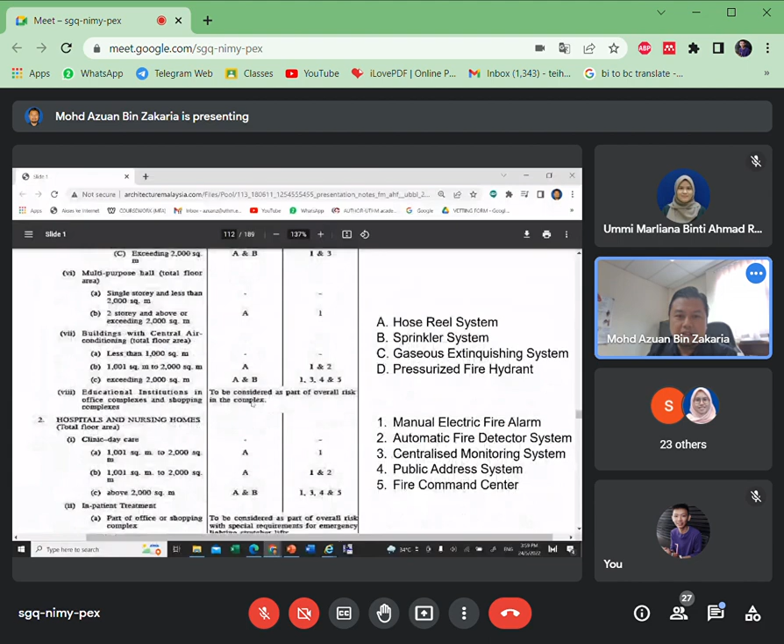So what is required for gases? Where should gases apply? We found D — D is pressurized fire hydrant. Normally, for example, in a flatted factory block, 3 stories and above, with a compartment exceeding 1,000 square meters, this needs A and D, meaning hose reel is required and fire hydrant is also required.

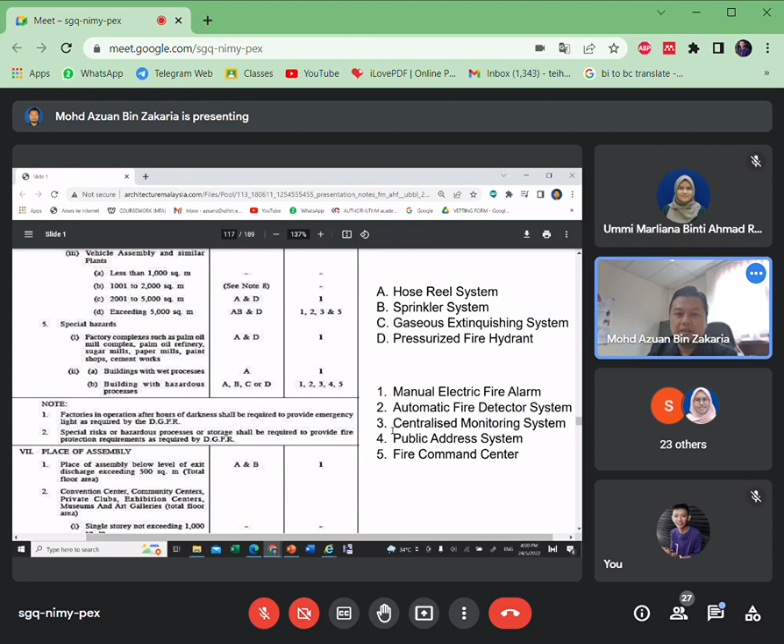In some conditions, hose reel, sprinkler system, and D are all required. And C — I found one C — for special conditions, special hazards, buildings with hazardous processes, need A, B, C, or D. So this is where they decide what to use.

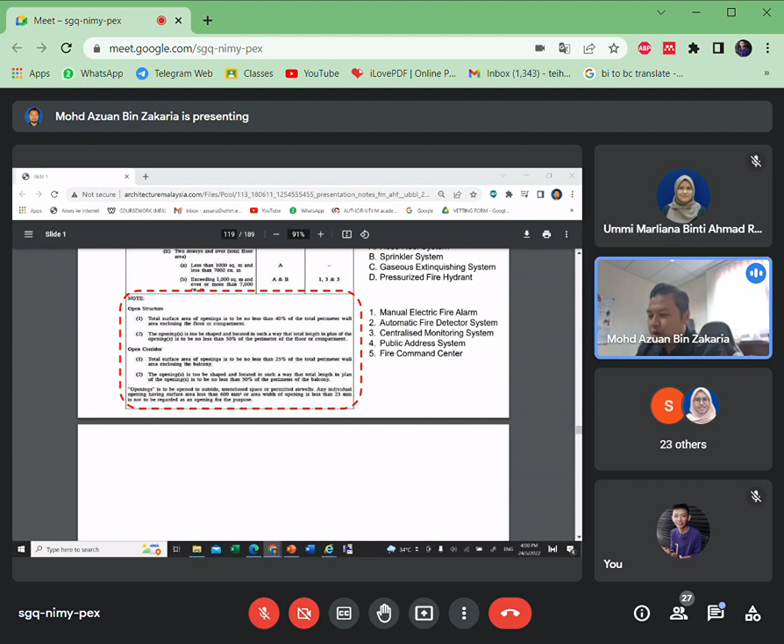I think we have reached the time. So may I know, do you understand, do you get a clear picture about the fire safety system, or do you want to ask anything regarding this system?

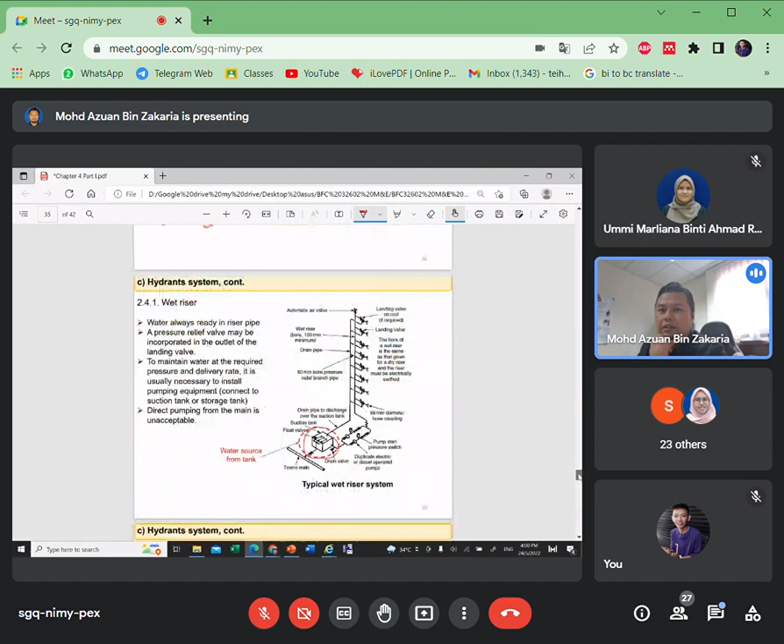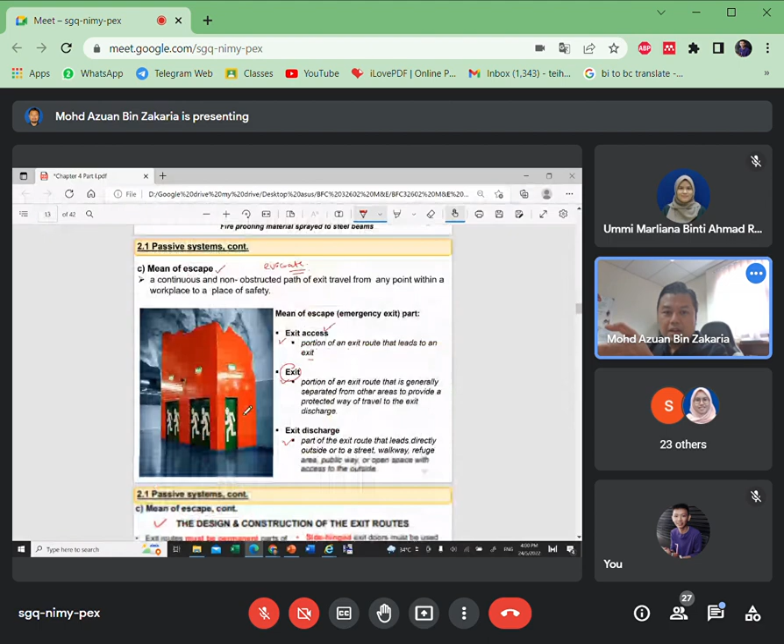This slide and its content already, for example for active fire systems, lists the types of systems. So if you want to check more detail, you can check online or read the books in detail about how it operates and some requirements.

You can also find this in MS1910 and BS9250. I cannot cover everything because chapter 4 next will be building transportation. So hopefully you can explore this, and if you have any question during revision, you can ask me.

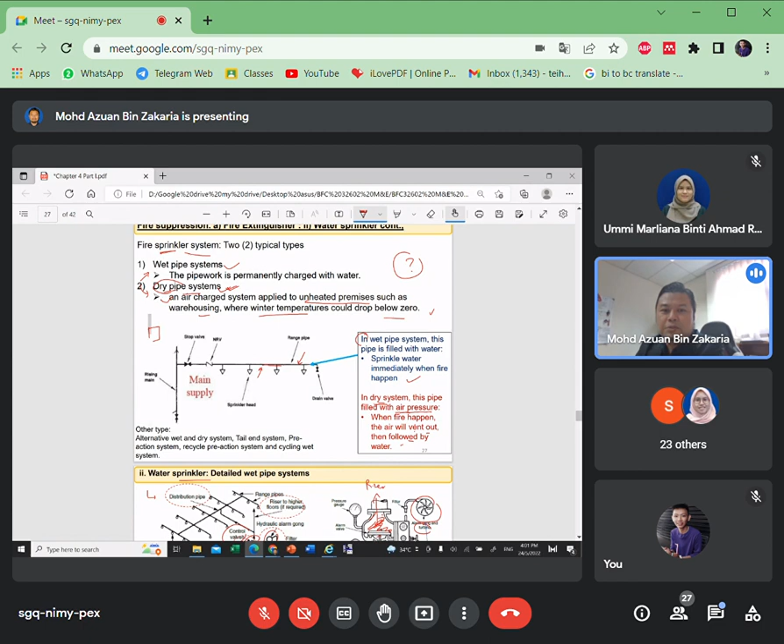Thank you, thank you, Doctor. Doctor, thank you, Doctor.